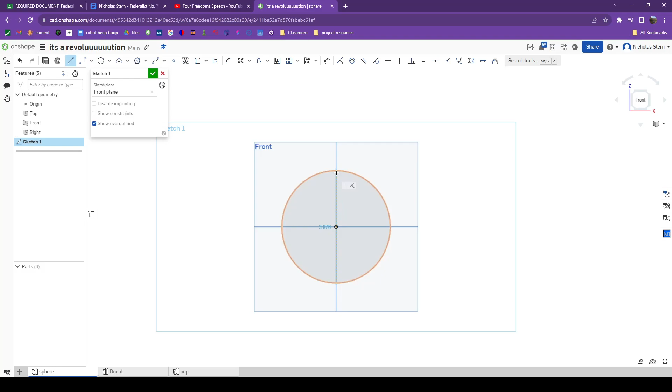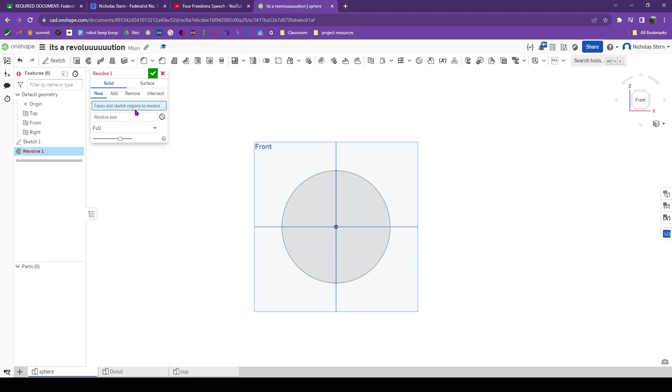So we can see if we use Revolve, it asks for two things, the face and then the revolve axis. Sometimes it may be in surface or something, but if it's like this, just make sure to shift it over to the solid tab. So we're going to be on new here, and we're going to choose this half circle, and now it's going to be in red and ask for the revolve axis. So what it's asking for here is what line it needs to spin around, basically.

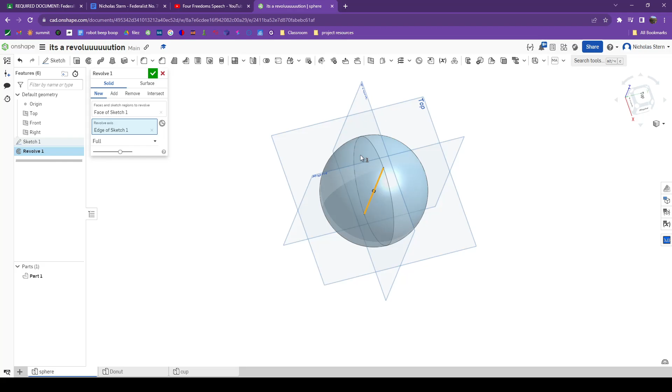So we're going to choose this center line, and what it does is it takes this half circle and flips it all the way around in 3D. So if I make it just one direction, see, I can set it to a certain angle. So this doesn't just make spheres, but you can change how much you want it to revolve around. So for now, we're just going to make this full.

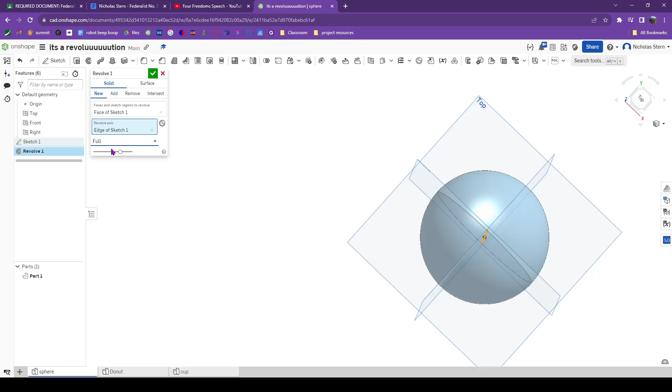And now, just to make it even more clear, let's make a donut now. This is going to be really simple, just a donut looking shape. So I'm going to make a construction line in the middle because my part won't actually be touching this line, but I want it to revolve around this line.

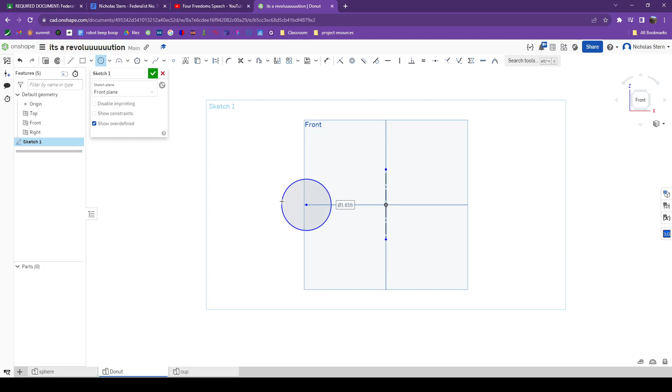So now, if I just take a circle and put it on the outside here, and then we confirm the sketch, I can revolve it, I can choose this circle, and rather than choosing a line in the middle of the circle as a revolve axis, if I choose this center line here, it revolves it around that.

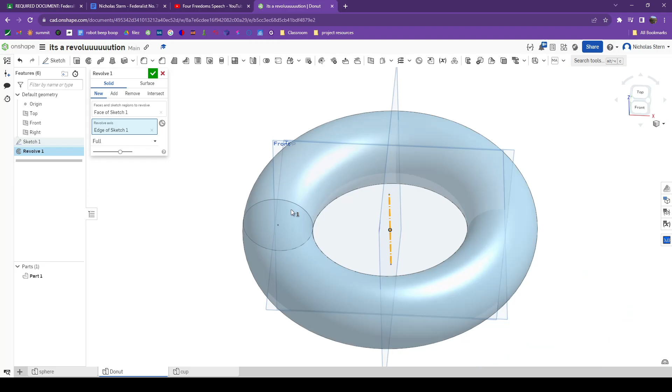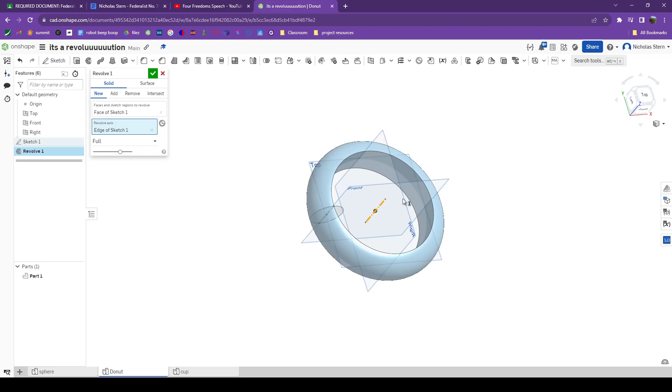So you'll notice I didn't make a semicircle, because if I had done that, it would have looked a little bit like this, and that's not a donut shape, it's like a ring. So in this case, you do a full circle rather than a semicircle.

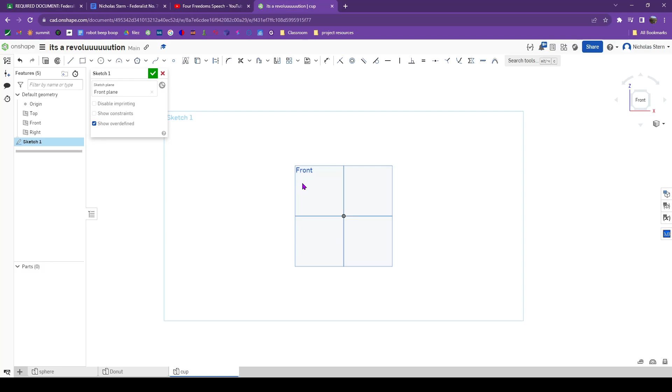Okay, finally, we're going to do a cup. This will hopefully show you how you don't just use Revolve for spherical things. You can also use it to make round shapes easier rather than layering it one thing at a time. So we're going to make this similar to how we made the sphere. So we're going to start off with a line down the middle.

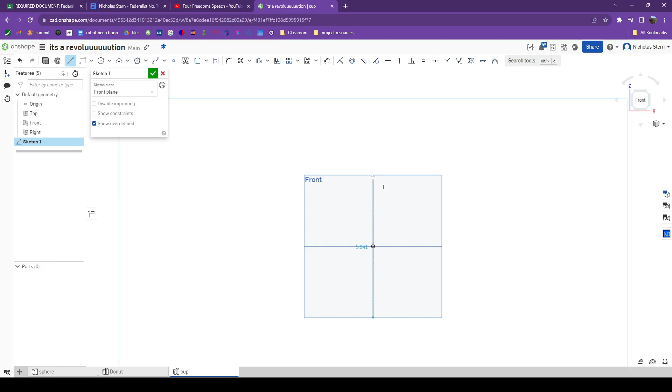And what we're going to do is make a fancy cup shape. Now, I am no cup expert, so this is not going to look great, but I'm just going to try my best here. So this is the part you drink out of, and then let's make this parallel.

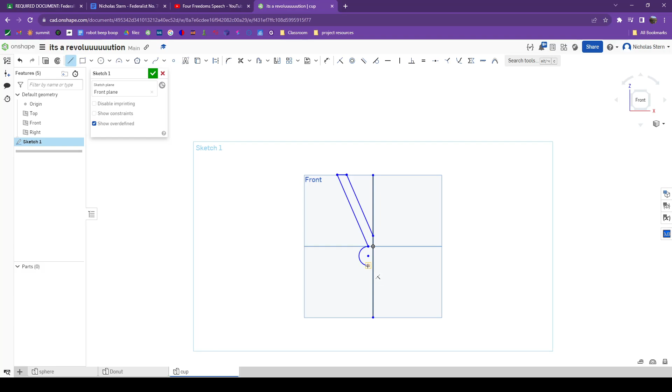Okay, this is going to be a weird looking cup, but maybe we can add a fancy little thing there, and then goes out, and then back in, then flat, then out, then arch with a tangent line here, make this horizontal.

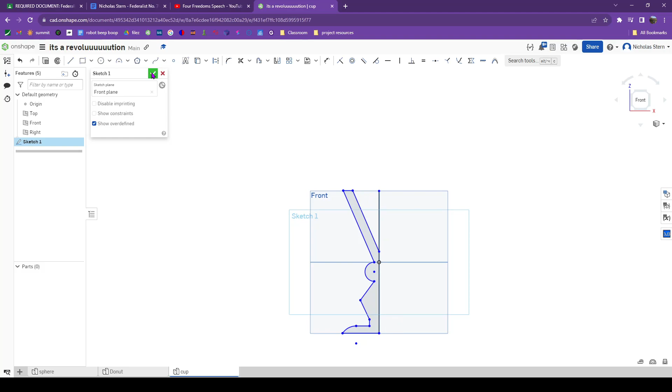So you may be confused what's happening here, and basically what I made is, if you picture a cup and you cut it in half vertically, this is like half of that. So just to make more sense here, if I click this shape and revolve it around this axis, we can see now it becomes like a cup.

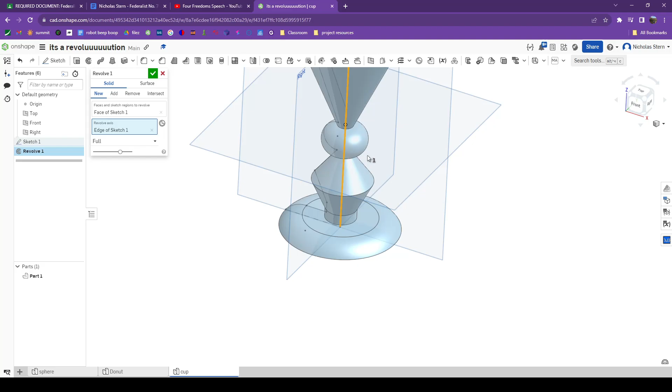So what this does is it makes it easy, because what I would have had to do before would be make a weird circular plate, extrude it, and then fillet it weirdly, and then make another cylinder, and then make a weird pyramid cone shape here. So Revolve is really useful for this.

For FRC, we don't use it all too much, but it's still really good to know how to use this tool, and it's a really useful tool in general.